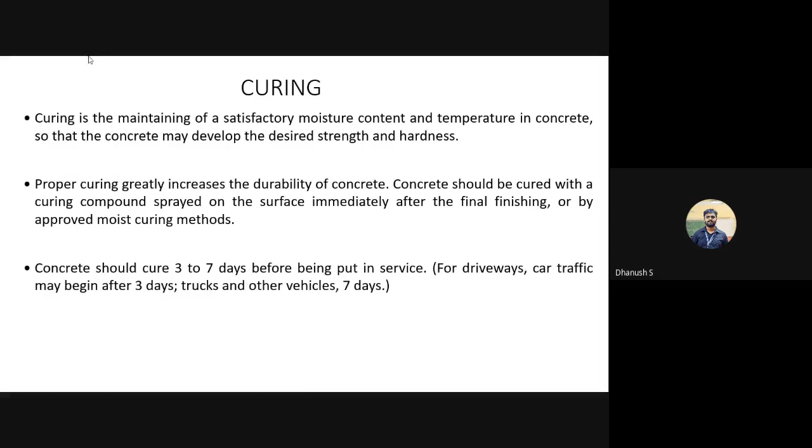So why do we have to ensure sufficient moisture is there? It can be for a lot of reasons - the temperature, the wind speed, the humidity. So the water that you've added inside the concrete mix can get evaporated, can get lost, carried away by the wind. If this water that we've added is lost, there is not sufficient water for hydration. So we have to supply this water continuously. That's one reason.

The second reason is, although higher temperatures accelerate the process of hydration, we'll learn at a later point about something called steam curing, where we cure concrete using very high temperature steam. High temperature, no doubt, increases the rate of hydration, but since the temperature increases, the water will evaporate. So you can't simply cure concrete by increasing temperature - you can cure concrete by increasing temperature whilst maintaining a moist environment, say something like steam. So water is a necessity along with heat.

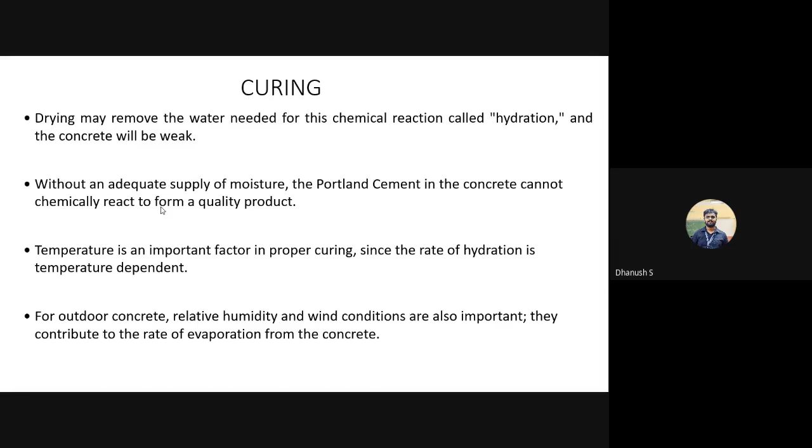So like I said, why is it important? If you don't cure it properly, the strength of concrete drastically reduces by up to 50%.

This is another thing. See, we live in Bangalore, so for us, temperature and temperature fluctuations is not that much of an issue.

Whereas if you go to areas where it's too hot, as soon as you place concrete, the water gets lost. So there you will have to start the process of curing immediately after the initial and final setting time is over.

On the other hand, if the temperature is too cold, the process is going to be difficult again, because the water that you've added into the mix has the problem of freezing. Once the water freezes, it is not physically available to take part in the chemical reaction with cement and for the hydration process to happen.

So in hot weather conditions, we use cold water or ice cubes in the concrete mix, whereas in cold weather concreting, we actually use hot water. Just keep this in mind.

Next, like I said, more C-S-H gel formed, better is the density, more is the durability, and lesser is the percentage of voids present, the less porous the structure is going to be. Or in other words, it is going to be more watertight — it will not let water seep through it or percolate through it.

Next, the last point I've already mentioned: curing is basically ensuring cement does what it is supposed to do, and concrete can become what it is capable of becoming.

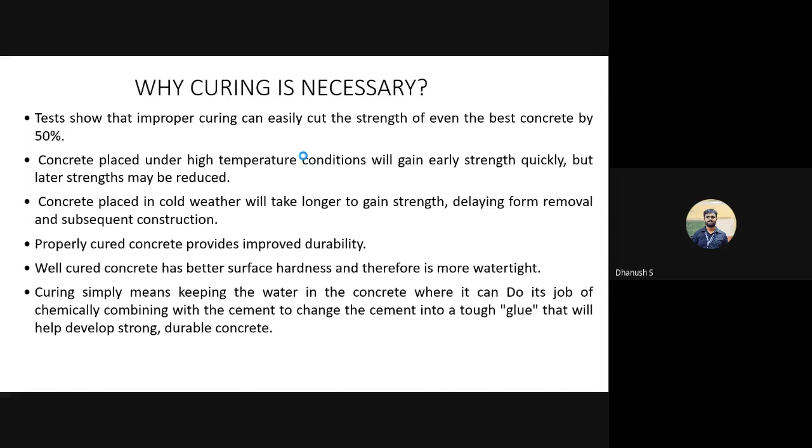Let us move on to the different ways in which curing can be done. So the most common method, like I told you, is water curing.

One second, my system crashed. I'll get back to you guys. So sorry for the inconvenience, I don't know what is happening today.

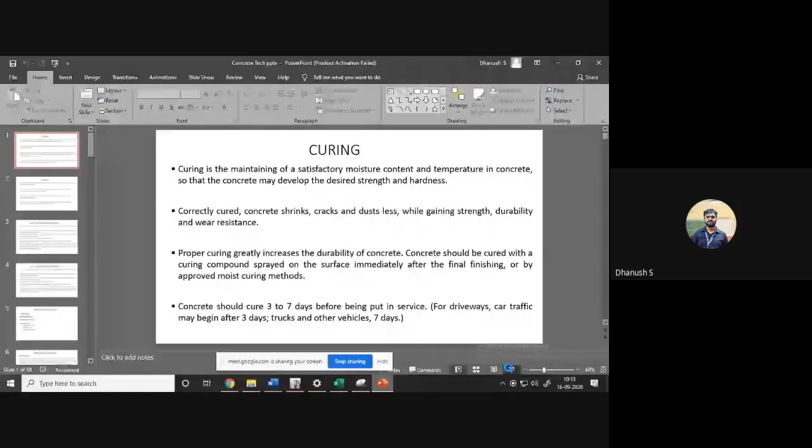Where were we? The different ways in which curing can be done. So the most common method, like I told you, is water curing. In water curing, we basically ensure that there's enough water, or a layer of water present on concrete, so that this temperature can be maintained and water is present.

You should also know this: the water applied is only applied on the exposed surface, the surface exposed to the environment. In case it is a hollow surface, we don't necessarily fill it inside, or if it is within the formwork, we don't pour water between the gap of the formwork and concrete. You only apply water or make water stand where there's a possibility of water leaking out or evaporating out. Other places, curing is not really important.

So the different ways in which you can supply water is by immersion. Immersion is like I told you, whatever we do in our lab — we demold the cube or beam, take it and put it inside a curing tank.

So that is immersion. Next is ponding. Ponding is this image on the screen right now. Basically, you use clay or mud and build a temporary bund sort of thing on the edges of your concrete structure, and make a freestanding water there — you create an artificial pond with the help of that.

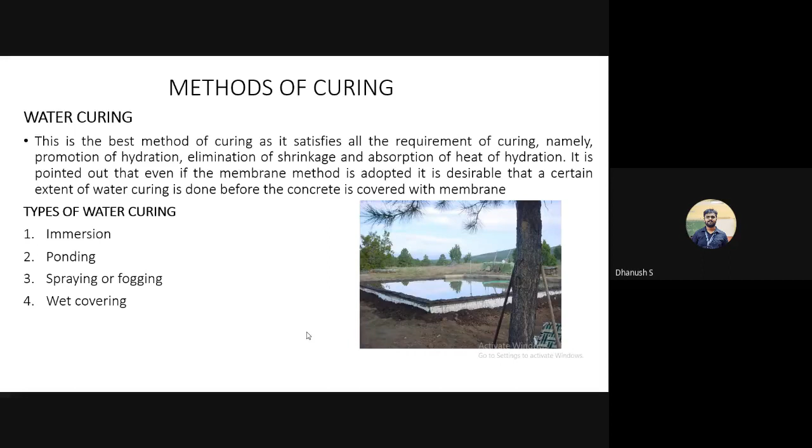Okay, so the next method is heat curing. When I say heat curing, do not think I simply supply heat, because heat sort of speeds up the hydration process that is there when the temperature rises, but it is a two-sided coin sort of a thing. The hydration process not only speeds up, but hydration also requires water. But if the temperature increases, the water evaporates. So when you're increasing the temperature by the form of heat or whatever, you should always ensure that there is sufficient water also, if not in the form of liquid water, at least in the form of steam.

So when we talk about heat curing, it can be done in 4 ways: steam curing at ordinary pressure, steam curing at high pressure, curing using infrared radiation, and the last one is electrical curing. So I'll briefly explain each one of them.

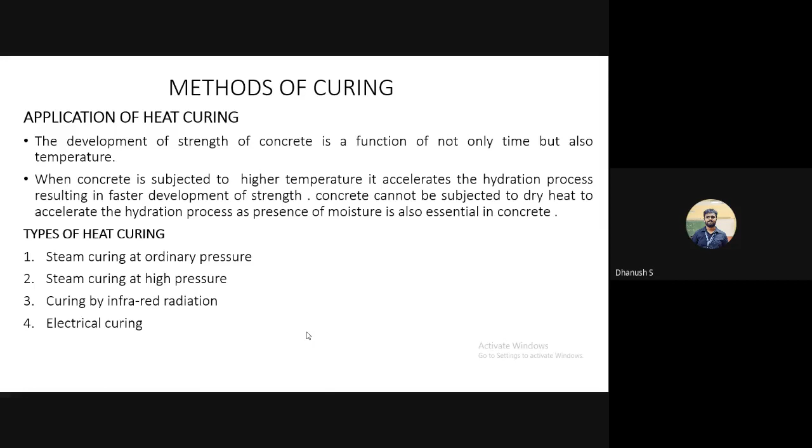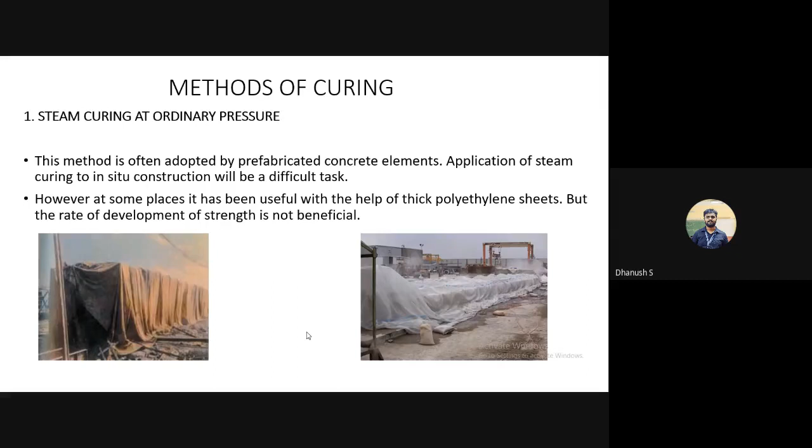At ordinary pressure is when you don't have a sealed chamber, there is no airtight chamber where you can go do curing. This is mostly done for all these precast structures, like metro girders and railway line sleepers, things that are precast in the factory. So what you do is you stack all these precast prefabricated structures and cover them using a very thick polythene sheet or something that can retain steam inside it, and then you apply steam into it. So why is it at ordinary pressure? It is not sealed, you can't really increase the pressure. There will be some opening through which your steam can eventually escape. So this is steam curing at ordinary pressure, most suitable for precast prefabricated structures.

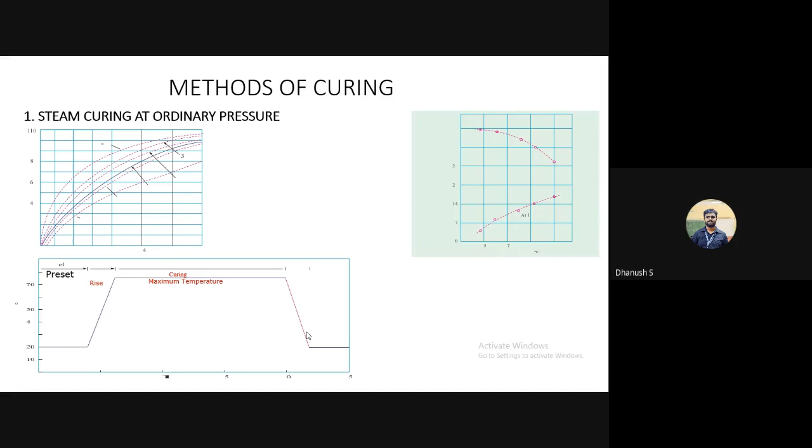Next is steam curing at high pressure. Here it has to be a closed chamber, so there is a huge steel drum. This can again be used only for precast prefabricated structures up to a certain size. If it is small enough to fit into this steel container, then you place it inside, then apply steam at high pressure. Doing it at high pressure is definitely advantageous than doing it at normal pressure, but this cannot be used for all the applications like in the previous case. There is this limitation of the size of the member that you are trying to cure.

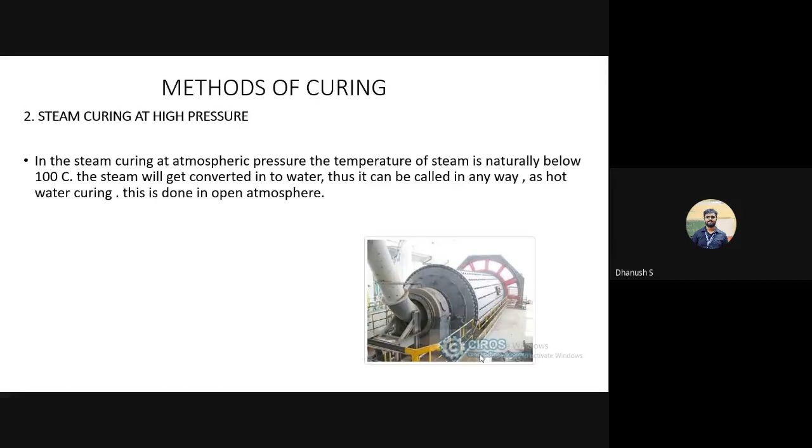The next one is by infrared radiation. In a lot of cold countries, where the temperature can go below sub-zero, using steam can also not be an option because it would rapidly cool. So the other way of doing this is by using infrared radiation. You apply infrared radiation, and that will eventually increase the temperature there, and that's how curing happens.

The last one is by electrical curing. This is mostly limited to research purposes, it is not practically applicable. What you do is you basically embed electrodes during the process of casting of concrete itself and pass AC current. If you pass DC current, electrolysis might happen and the water that is present inside might break and the curing will not be effective. So you pass AC current, and because of this current flowing through the concrete, and concrete having its own dielectric properties, the temperature would tend to increase and the hydration would fasten. This again is not widely used.

One reason is because there's a lot of danger involved. As we know, concrete by itself is never used, we always use reinforced cement concrete. And it has also been observed that when you pass electricity through concrete, the reinforcement that we embed inside concrete can be subjected to accelerated corrosion, they tend to rust and corrode easily. So this last method is not to be widely used, especially if you have reinforcement within concrete.

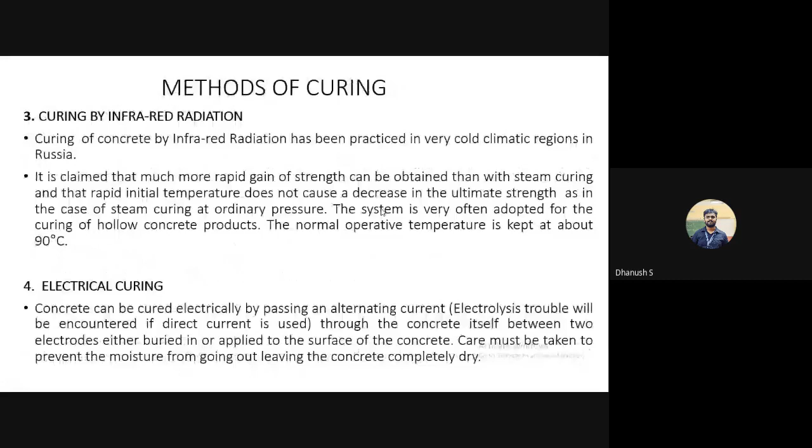There are a few other methods that we've already spoken about. These days you have curing agents as well, a hydrophobic spray sort of material. As soon as final setting time is over, you come and spray a layer of this material on top of the concrete surface. It will create a thin film that will prevent the water from evaporating. Or you basically cover the surface of concrete with anything that will prevent evaporation of water. So these are all various methods of curing of concrete.

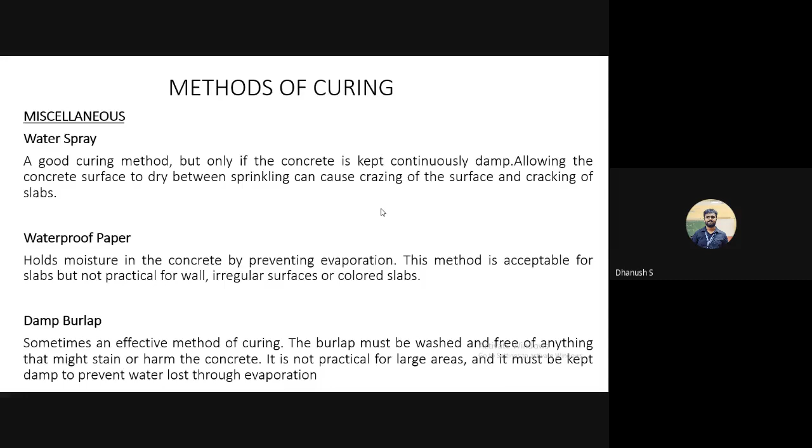Okay, and like I told you, your curing should happen for a minimum duration of at least 7 days.

Next, we'll talk about two defects in concrete that can be observed, before we actually talk about workability. This is directly related to the compaction process we were discussing. So what happens if you don't properly compact concrete, or if you haven't done your mix design properly? There are two things that can be observed.

One is called segregation, the other is called bleeding. They both might seem similar. In fact, bleeding is a type of segregation, but there is a key difference, which I'll explain. In segregation, what happens is your aggregates and the rest of your cement paste separate.

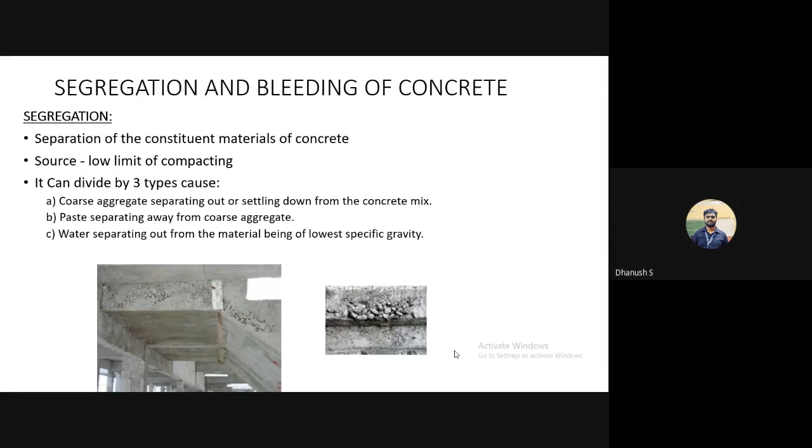The last case is where the paste and the coarse aggregates are still together, and only the water rises to the surface through capillary action. This last case sort of falls into the terrain of bleeding.

So, segregation is whatever we've just discussed. The reasons for segregation would be improper mix design and improper compaction. When I say improper mix design, the ratio you get in the end, like 1:2:4 or whatever, has to be very scientific in nature. It has to be decided based on your packing density and particle size distribution, to see if the curve shape is S or not.

If you follow unscientific means, just adding however much of whatever you want, they won't blend together properly, and eventually they will fall apart even in the fresh state. So that is improper mix design.

The last thing is, when placing concrete, if you impart a lot of mechanical energy while placing it, like dumping it from a huge height, or conveyor belts traveling at faster speed and dumping the concrete from a great height or at greater speed, the heavier materials will tend to get carried away due to inertia and separate from the rest of the mixture. So these are all reasons for segregation.

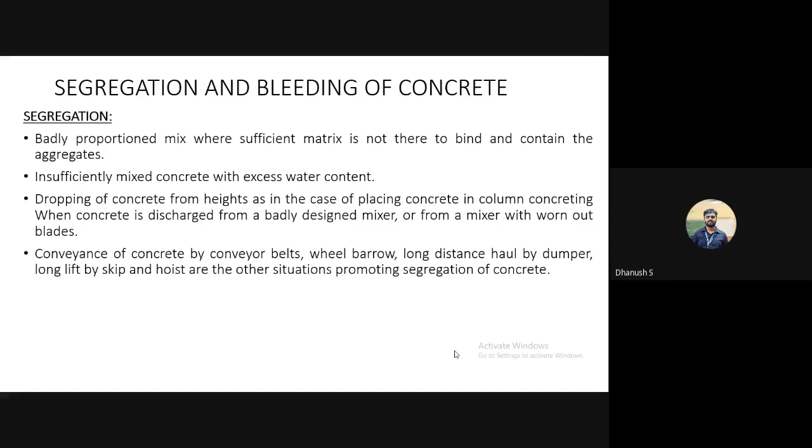Moving into the more specific case of segregation, that is bleeding. Here, the water present in your fresh or wet cement rises to the surface through tiny capillary tubes found within the concrete matrix. This is something commonly observed in all construction practices.

What happens is these masons or workers tend to over compact concrete, and when finishing the top surface, they use a very smooth tool like a small metal plate and keep tapping the top surface. When you keep tapping the top surface, the water rises to the surface.

To draw an analogy, next time you go to a coastal area near a beach, even standing a few feet away from the water's edge, if you keep jumping in the same place or tapping the sand repeatedly over time, you'll observe that water actually comes to the surface and the sand sinks below. Same logic happens here—if you keep tapping or over compacting the top surface, the water inside, due to its specific gravity, will rise to the top.

So this is bleeding, a very specific case of segregation where only water gets separated and comes to the surface. One can also argue that a little bit of bleeding, not a lot, is actually good for concrete. I'll tell you in what way.

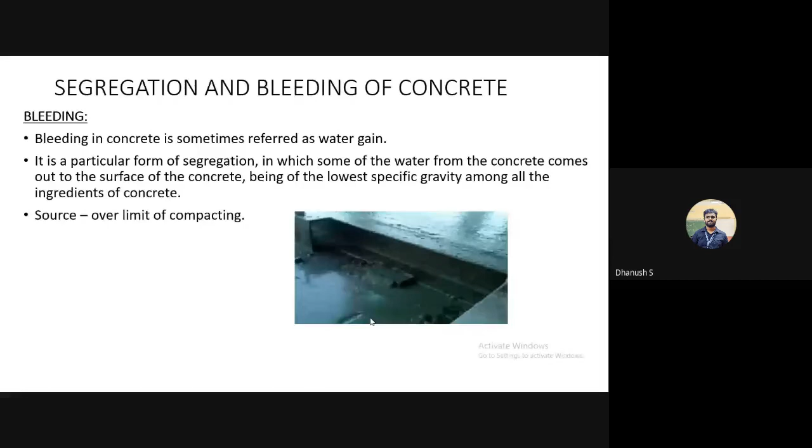I'll just skip through this since I already explained it. So both segregation and bleeding basically lead to these problems: the strength of concrete is reduced, there'll be cracking on the surface, and the bond between your cement paste and your aggregates is lost, again essentially reducing the strength of concrete.

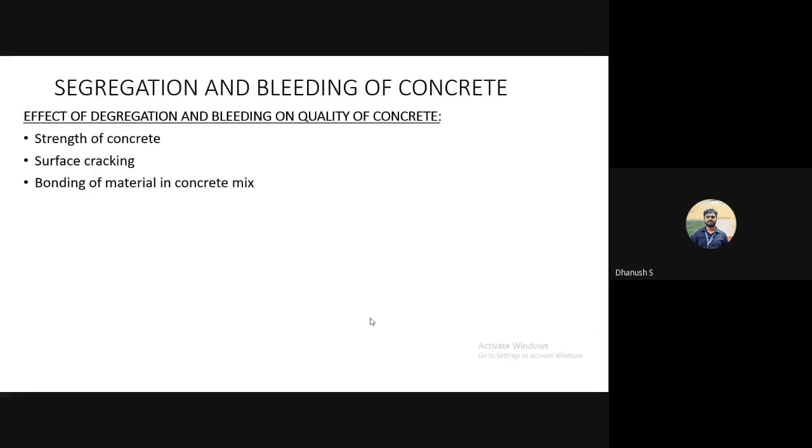Moving on to why segregation and bleeding occurs, we come to a topic called workability. I've already defined what workability is when we spoke about Abrams' law, where we said the strength of concrete is inversely proportional to the water cement ratio, provided the concrete mix is workable.

So what does workable mean? Workability is basically the ease with which, or the amount of energy or compactive effort through which, you can handle concrete. When I say handle concrete, what do we do with it? We take it, mix it, place it, and so on.

This placing should happen with a lot of ease, and the compaction should happen with a lot of ease. I should not spend a lot of energy or mechanical vibration for this concrete to go and settle down and take its form or shape. The lesser the amount of energy I have to spend for compacting, the more the workability of concrete. So what do you think are the various factors that affect the workability of concrete?

The first and foremost thing is obviously the amount of water that you add into the mixture. So if I want a concrete mix that is workable, can I keep adding as much water as I want? No. You will have to draw a line at some point, because we just learned about segregation and bleeding. You can't simply keep adding water because you want the concrete to be more workable. In fact, this is one mistake that a lot of unskilled laborers do at site.

They would have mixed a lot of concrete at once, and they probably take a lunch break or whatever, and then come back and a lot of concrete is unused. They pour water into the same concrete to make it more workable. These are all detrimental effects, things that should not be practiced on site at all.

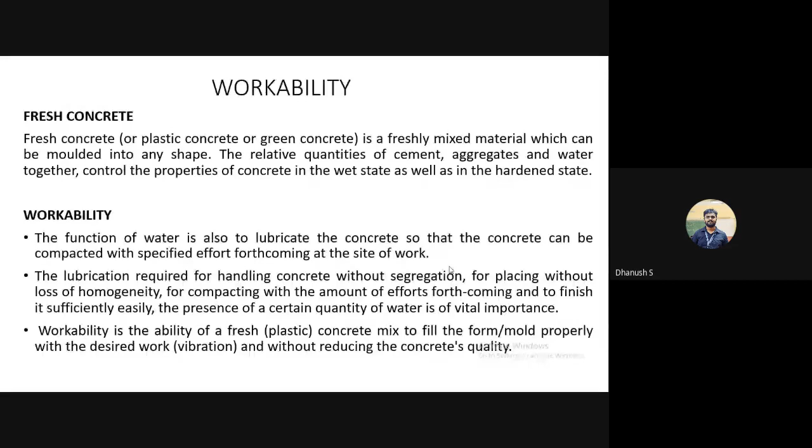This is one thing I should have told you before. The wet concrete in its fresh state, as soon as you mix it, is called plastic concrete, because it can deform easily and does not retain its original shape. Sometimes it is also called green concrete. So fresh concrete is green concrete.

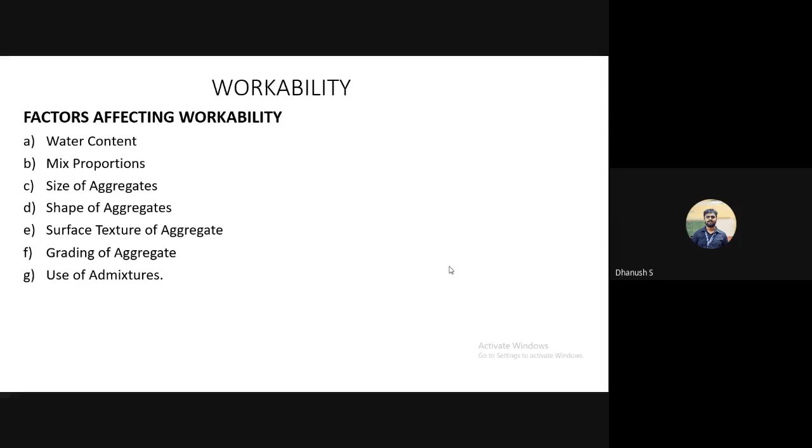So these are the various factors affecting workability. Starting with the first one, your water content or water cement ratio, the most obvious parameter. You cannot keep increasing water as much as you want. However, what you can do is maintain a constant water cement ratio.

For example, if I'm using a water content of 180 kgs per meter cube, with a water cement ratio of 0.5, I'm using 360 kgs of cement with 180 kgs of water, which is fine. But if I want my mix to be slightly more workable, and I increase the water content from 180 kgs to 200 kgs, I can maintain the same water cement ratio. A corresponding cement content can also be added. So if I'm using 200 kgs of water, maintaining the same water cement ratio of 0.5, I have to use 400 kgs of cement.

So this is one compromise we can do. If you're increasing water, make sure you add a corresponding amount of cement also, so the water cement ratio remains constant and the strength does not get affected. Lesser water is a problem, the mix becomes too harsh. More water causes segregation and bleeding, the paste separates, aggregate separates, and strength is lost. So water should always be in that ideal limit, neither too much nor too little.

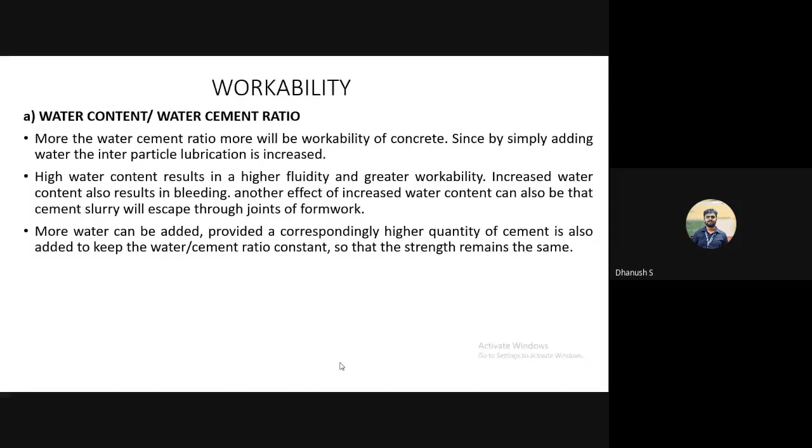Next is your mix proportion. When we do mix design, I'll stress upon this point more, but I'll mention one key point now. Whenever we are placing concrete by pumping, and yesterday we learned about various methods of transporting concrete, remember, the codal provision says you can reduce the coarse aggregate content by 10%.

So what does that mean? If I want something to be more workable, more pumpable, I want the percentage of coarse aggregates in my concrete mix to be less. So in a way, the more the percentage of fine aggregates, the more workable it is going to be. So the ratio of coarse aggregate to fine aggregate, or the ratio of aggregate to cement, will affect workability.

The more the paste, or pasty content, which is basically all the finer particles - cement plus water plus sand - the more workable it is going to be. That is why take mortar: in mortar, you don't have coarse aggregate at all, so mortar, even with lesser water cement ratios, is very workable. As soon as you bring larger size aggregates into the picture, the mix becomes very harsh because of the larger surface area and becomes less workable.

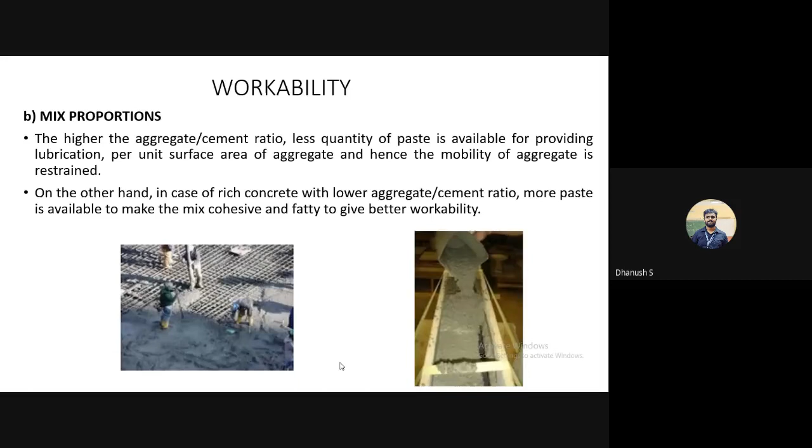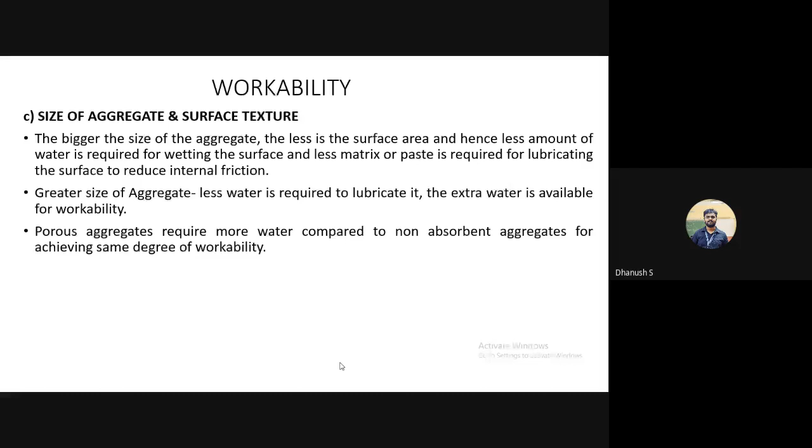Next is the size and surface texture of aggregate. I'll combine size, surface texture and shape together with an analogy. If you have aggregates that are round and smooth, smoother surface areas will obviously offer lesser friction, and since there is lesser friction, there will be lesser bonding between the cement paste and the aggregates. So round aggregates offer less friction, hence more workability.

That is why contractors always prefer river sand. Try talking to a mason who has been working for a long time in construction, he does not like M sand at all. He says M sand is very bad, no matter how much M sand we use or how much water we add, the mixes are very unworkable - we like river sand only. So how is river sand formed? River sand is basically formed over an extended period of weathering of rocks in alluvial plains, through the process of flowing downstream from the river side.

So over all this millennia, what would have happened is these river particles that are formed would have a very smooth round surface. And since it is smooth and round, when it was used in concrete, the concrete mix was more workable.

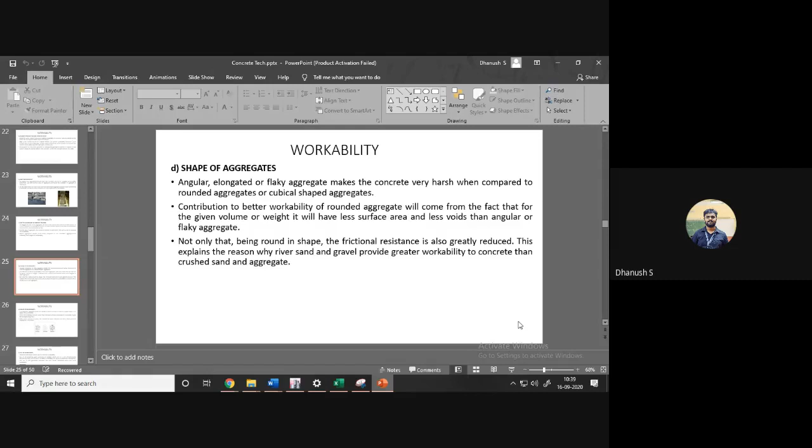Okay, just before I got interrupted here, I was mentioning something about size of aggregates. I told you larger the size of aggregates, more is going to be the workability. So this is one way of looking at it. Again, you might get confused when I mention the next point.

So there is something called total effective surface area. What I mean by total effective surface area is, let me see if I can draw a small sketch. Give me 1 second.

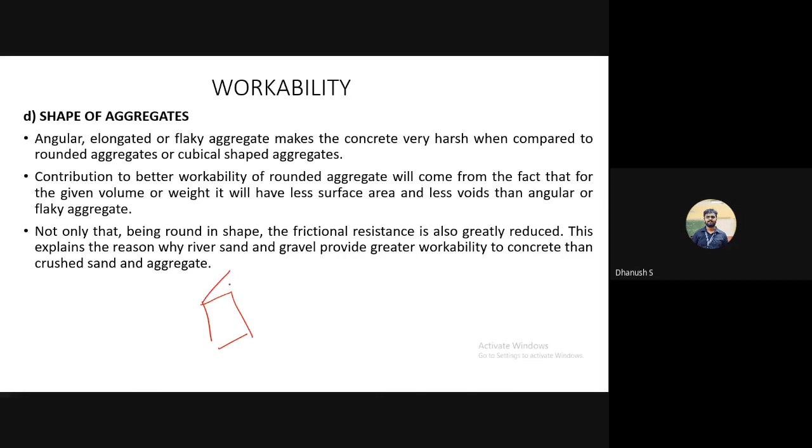Say I have a cube with a size of 10 mm. What is going to be the overall surface area of this? How many faces does this thing have? It will be 6 into 10 into 10. How much does this come up to?

Is this correct? So I have one huge cube of 10 mm. One side will be 10 mm into 10 mm, and you have 6 faces. This is going to be the overall surface area of the entire cube. Now what I'll do is break this cube into parts like this.

When I divide it into 4 parts on each face, how many smaller cubes do I get in total? 8 cubes, correct? And if I have to calculate the overall surface area of these 8 smaller cubes, what will I get? 8 into 6 faces for each cube, into the surface area of one of these cubes now, which is 5 into 5, since I'm dividing each side into 2. How much is this? 25, into 6 is 150, and 150 into 8 is 1200.

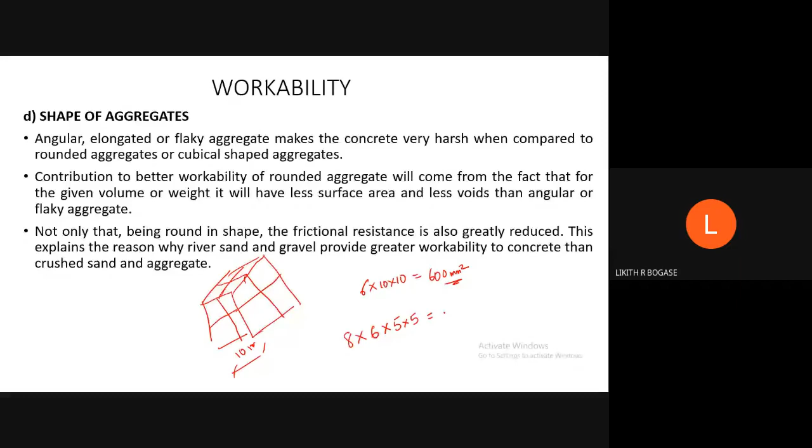So is this correct? The entire volume being the same, the entire weight being the same, as soon as I reduce the particle size, my surface area is doubled. Now, instead of breaking it into 4 parts, had I divided it into 10 parts, the surface area is going to be much, much greater than this again. So this is one thing you need to keep in mind.

If I'm reducing the size of the aggregates used in concrete, yes, it will become more workable due to the smaller size. But since the overall surface area is more, the amount of cement paste required to bond everything together will also increase. Understood the point?

So when we talk about self-compacting concrete that I was mentioning, the cement content that goes into this is very high because it needs to cater to the larger effective surface area.

So how do I say this? If 80 kgs of aggregates is what I need, and if I'm using 20 mm size aggregates, the overall surface area is going to be less. For the same 80 kgs, instead of using 20 mm, if I use 6 mm aggregates, I might need about 100 kgs of additional cement to achieve the same strength.

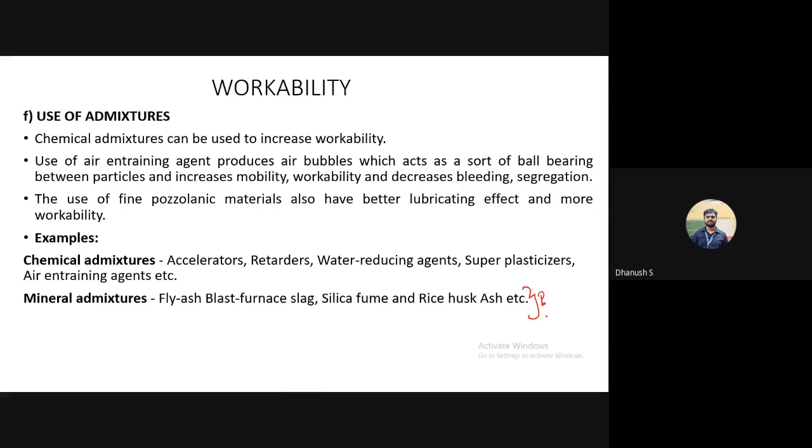...and its secondary byproducts, which is your calcium hydroxide, the silica present in all these pozzolanic materials will react with calcium hydroxide to give secondary CSH gel. So these are mineral admixtures.

Chemical admixtures are those that have nothing to do with hydration by itself, but help improve the key properties of concrete. For example, there's something called an accelerator. So if I'm doing underwater concreting, and I can't wait 10 hours for the concrete to reach its final setting time, I use an accelerator, which increases the rate at which the concrete sets and hardens.

Next, I have something called a retarder. What does a retarder do? I was giving you the example of Kumbalgod and JP Nagar - if the distance between the place where concrete is manufactured and the place where it is used is too far, I can use a retarder. It will delay the setting time - instead of setting in the initial setting time of 30 minutes, it will get extended to 3 or 4 hours. So these are the key things when it comes to workability.

We have something called water reducing agents and superplasticizers. So what these superplasticizers and water reducing agents do - I'll simply draw a rough sketch.

We'll talk about more of this in the future. So you have a lot of cement particles that are sticking to each other, and these cement particles are very small in size. These things stick to each other mainly due to the presence of static electricity, or because of the charges.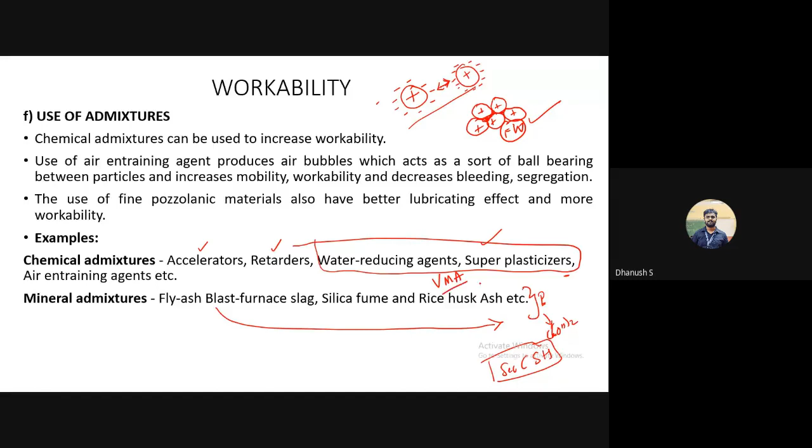Clear? These days you have a very new thing called VMA. VMA stands for viscosity modifying agents. So this is again a fluid which, when added to concrete in a minute amount, will modify the viscosity. It will increase the shear flow capacity of concrete, so it makes the concrete more flowable.

So you have a lot of admixtures. We'll deal with them at a later point. For now, just remember there's something called admixtures, and they affect workability. Next.

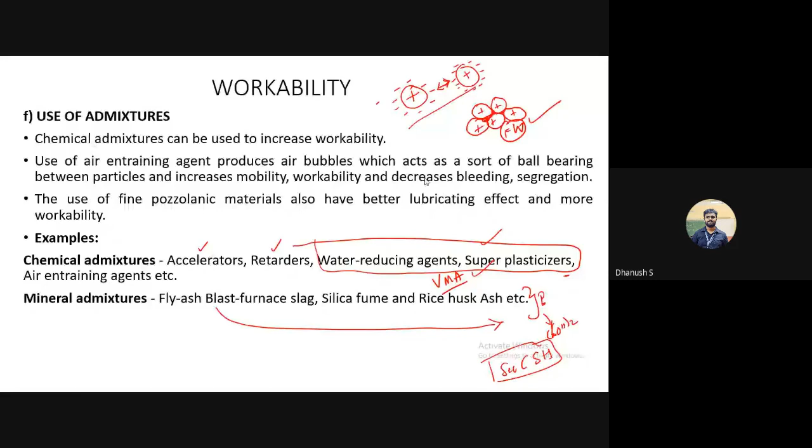Yeah, the last factor affecting workability is your weather condition. Like I told you, in hot weather concreting, where evaporation losses are more, the water gets lost, and once the water gets lost, your mix becomes less workable. At the same time, in cold weather concreting, workability also reduces, but for the other reason: your water will freeze, and since the water freezes, it is not freely available to act as a lubricant between the rest of the cement and concrete matrix. So workability is lost again.

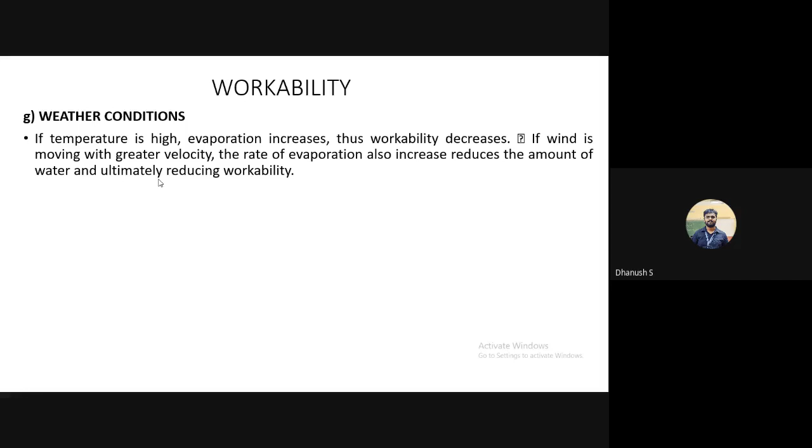So very briefly, these are the various factors that affect the workability of concrete. You can go through them point-wise when I share the slides, or go through the textbook. I think we'll stop here.

The tests on workability, I'll do in the next class. What I'll do is play a video first, show you how the test is done, and then explain why we're doing what we're doing. So in your laboratory, you have the slump test, compaction factor test, and VB test. You can also go through your lab manual to look at the procedure for these three tests.

Flow test you have too, but the flow test that we do in our lab is only for mortar. The same apparatus, slightly bigger in size, can also be used to find out workability of concrete. So to give a very brief idea about how we measure workability, each of these three tests is a different measure.

In slump test, we measure the deflection of concrete; it can collapse under its own self weight. So this is measured in mm. In compaction factor, we obtain a ratio of concrete under partially compacted condition to concrete under fully compacted condition. So your compaction factor is basically a unitless entity, simply a ratio of something by something.

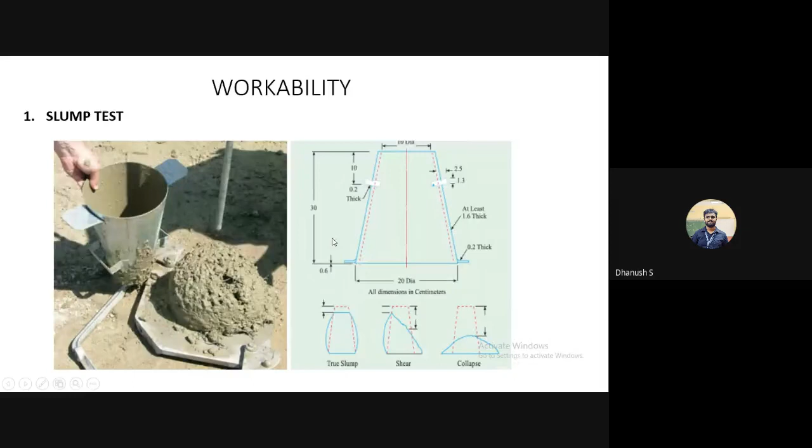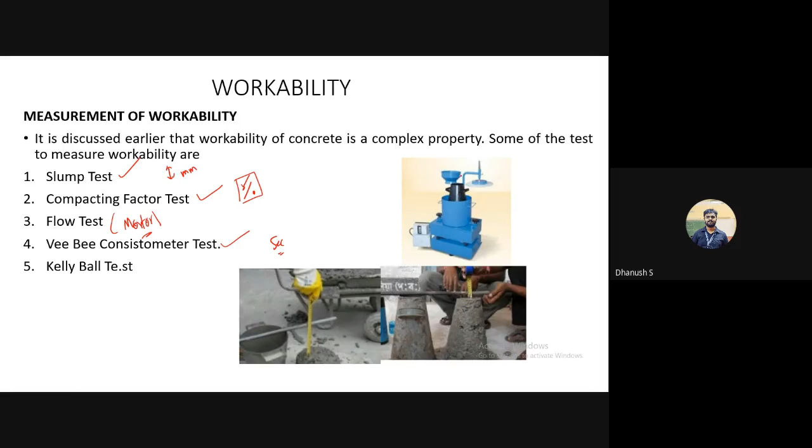And the last thing is your VB time. What happens in the VB test is we measure time in seconds. So this is the VB apparatus. We fill concrete into this cone, lift it up, and then switch on the vibrating table of the machine. So we measure the time that is taken by concrete to fill this cylindrical container.

So three different things we're measuring, and these three tests cannot all be used for all types of concrete. So I'll also tell you which test is more suitable for what type of concrete.